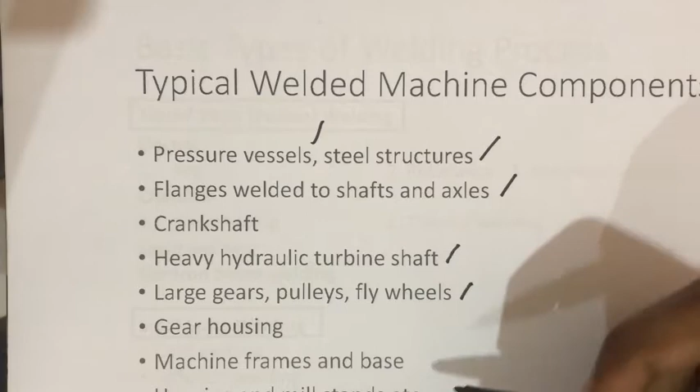So crankshafts, heavy hydraulic turbine shafts, large gears, pulleys, flywheels, gear housings, machine frames and bases, housings and mill stands, they all are being connected by the use of a permanent joint that is called the welding joint.

After this, there are different types of welding processes. They are categorized broadly. There are different types of welding joint. Broadly speaking, they are classified into liquid state, or we can say fusion welding, and another is solid state welding.

So what is liquid state or fusion welding? Fusion welding is a process that uses heat to join or fuse two or more components by heating them to a melting point.

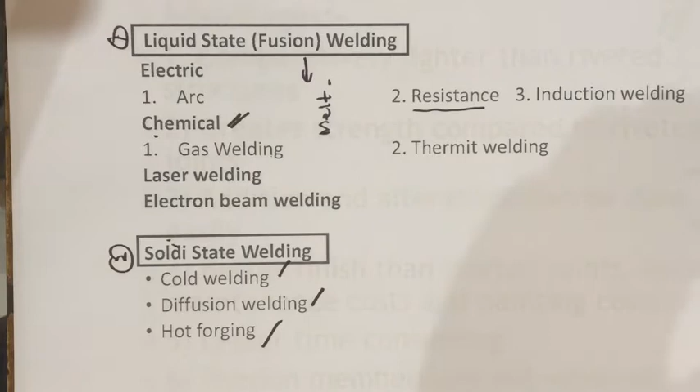So now we will thoroughly study one. Number one is electric arc welding. So what is the electric arc welding process? Basically, electric arc welding is a fusion welding process in which the heat required to fuse the metal is obtained from an electric arc between the base metal and the electrode.

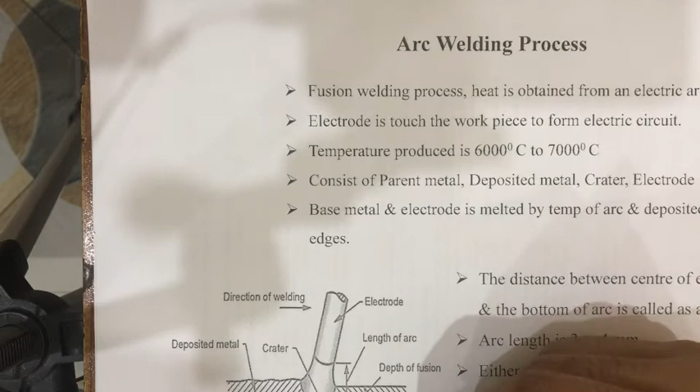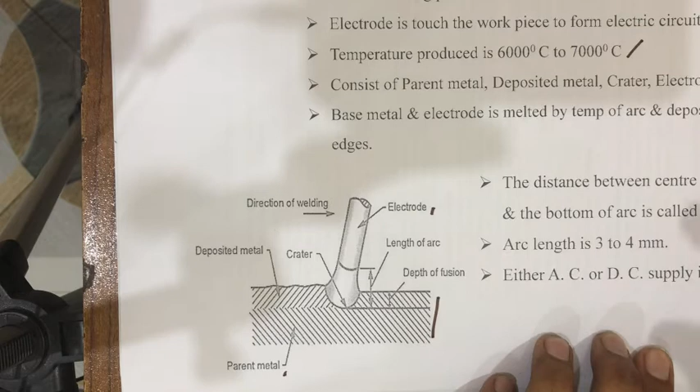So the electric arc is produced when two conductors are touched together and then separated by a small gap of 3 to 4 mm such that current continues to flow through the air. As we discussed, it consists of a parent metal, deposited metal, crater and an electrode. Now, during the welding process, a crater is generated.

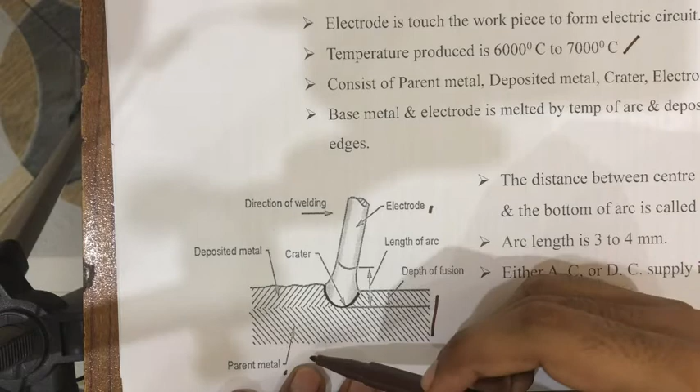The base metal, which we call parent material, and the electrode are both melted by the temperature of the arc and deposited around the edges. The distance between the center of the electrode tip and the bottom of the arc is called the arc length, or the length of the arc.

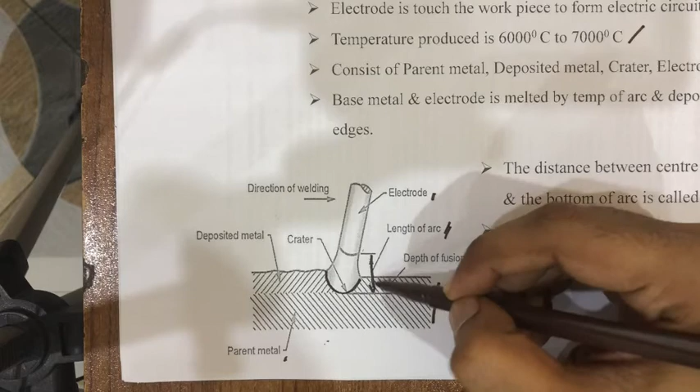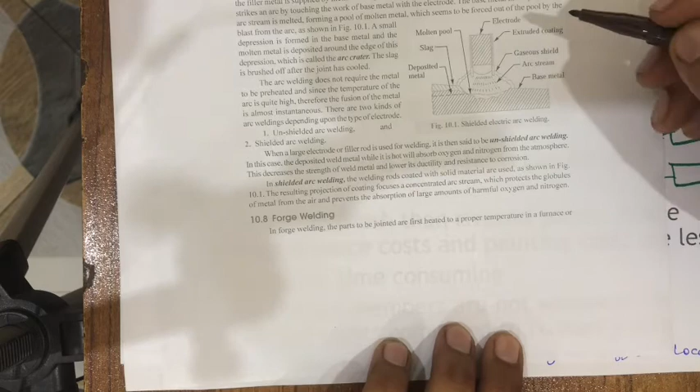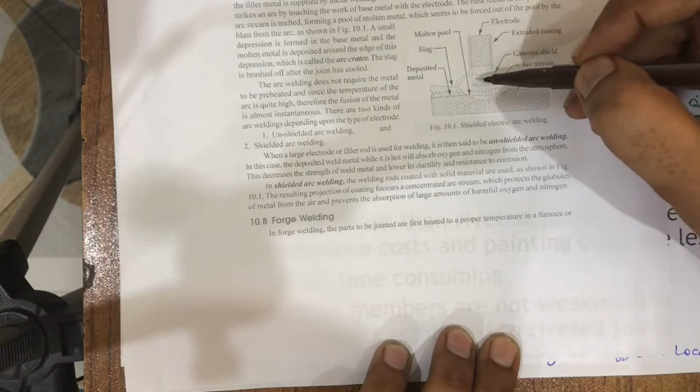This is nothing but the depth of fusion. As you'll see in your book, actually what is happening is a small depression is formed in the base metal and the molten metal is deposited around the edges, which is called the arc crater. The slag is brushed off after the joint has cooled.

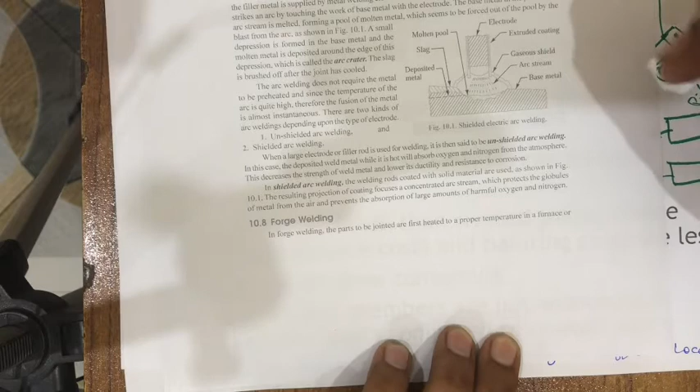So arc welding does not require the metal to be preheated since the temperature of the arc is quite high, already around 6000 to 7000 degrees Celsius as we discussed.

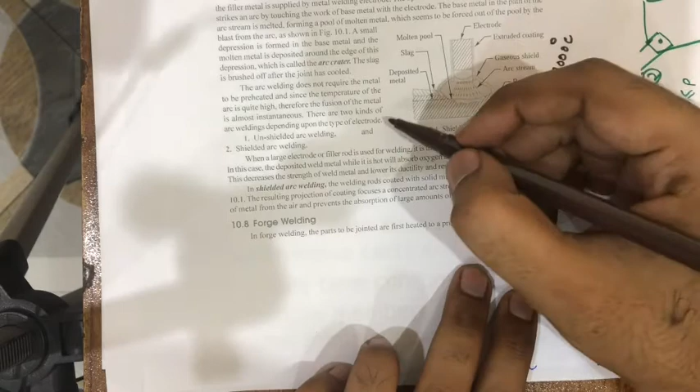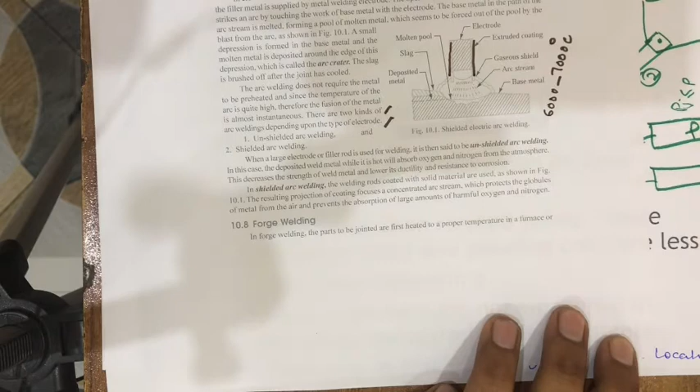So when a large electrode or filler rod is used for welding, it is said to be unshielded arc welding. In this case, the electrode will not be shielded by any inert gas. The deposited weld metal, while it is hot, will absorb oxygen and nitrogen from the atmosphere.

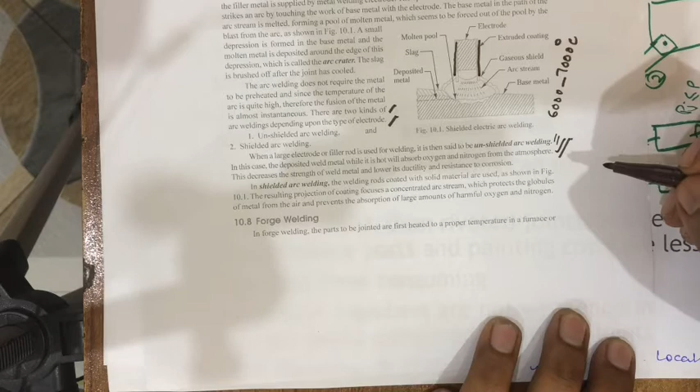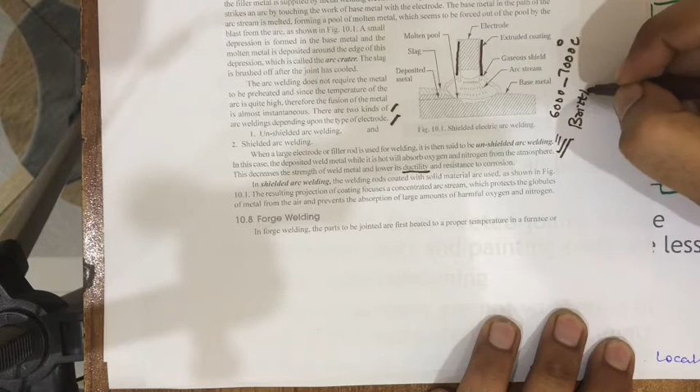And it decreases the resistance to corrosion. That means our weld becomes vulnerable to corrosion.

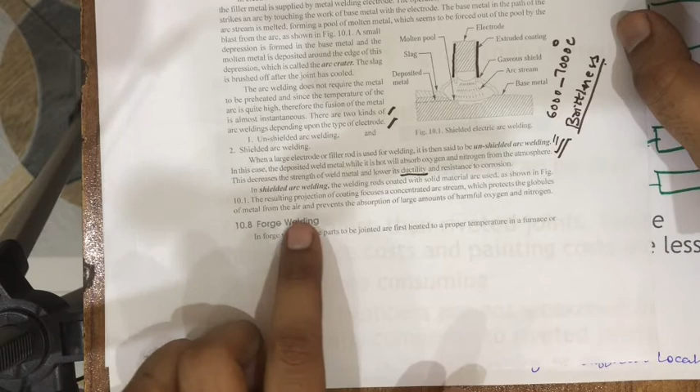In shielded arc welding, the welding rods coated with solid materials are used. The resulting projection of the coating focuses a concentrated arc stream which protects the globules of metal from the air and prevents the absorption of large amounts of harmful oxygen and nitrogen.

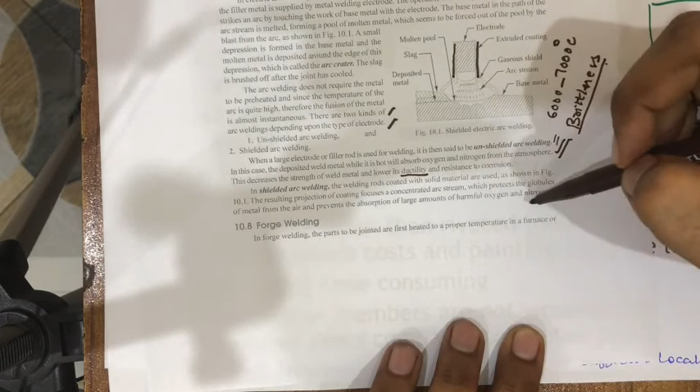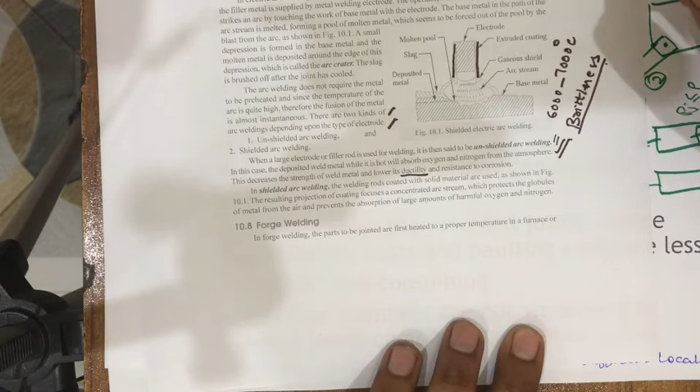So this is called a shielded arc, this is called the shielded arc welding process. So basically this is an electric arc welding process. Sir, you can see this in this video.

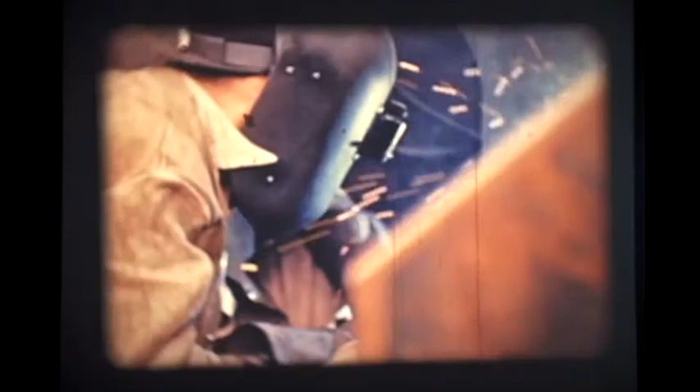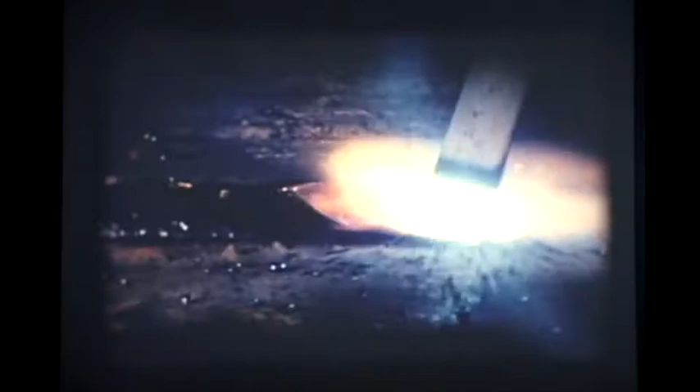Shielded arc welding is usually accomplished by means of an electric arc formed between the work and a coated metallic electrode. Let's see what happens. When the arc is struck, it almost instantly creates a temperature of about 6,500 degrees Fahrenheit. This melts both the base metal and the metal in the electrode.

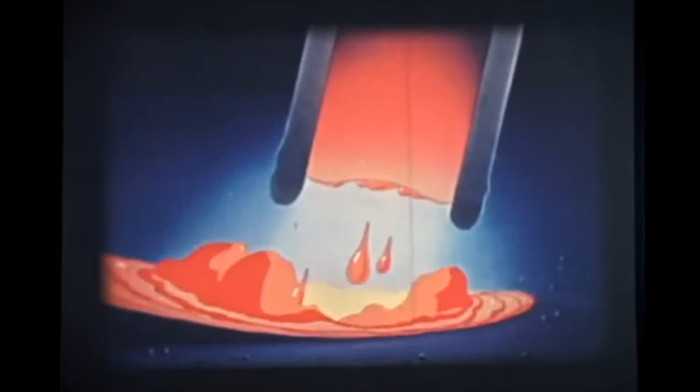The metal from the electrode is melted off in tiny droplets, carried across the arc and mixed with the molten base metal. The force of the arc and the forward travel of the electrode causes the mixed molten metal to be pushed to the rear of the crater where it cools to form a bead.

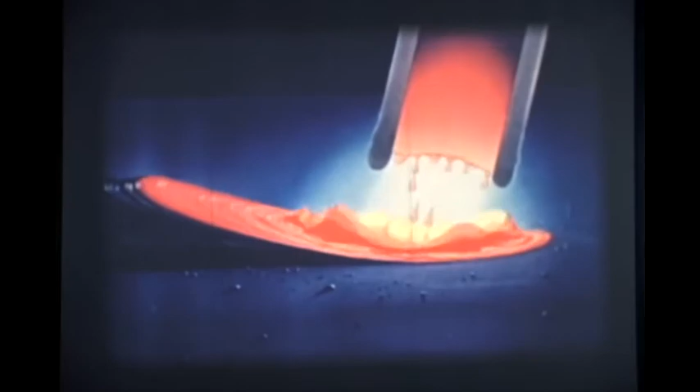The movement of this metal toward the rear of the crater and the depth of the crater are an excellent check on the quality of the work. The operator should learn to use it as his guide.

At the same time that the metal is melting, the coating on the electrode is being consumed. This takes place slower than the melting of the electrode, which shields the arc and helps direct the flow of metal. It also permits the use of higher currents, with the resultant faster deposit of weld metal.

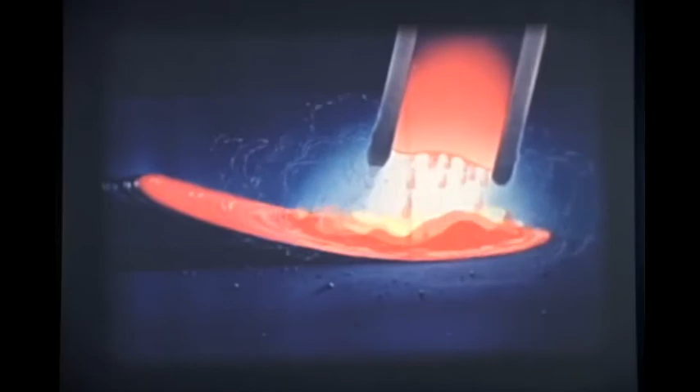A gas is formed, covering the arc with a protective shield that prevents the exposure of the molten metal to the air and therefore prevents the formation of harmful oxides and nitrides in the deposit.

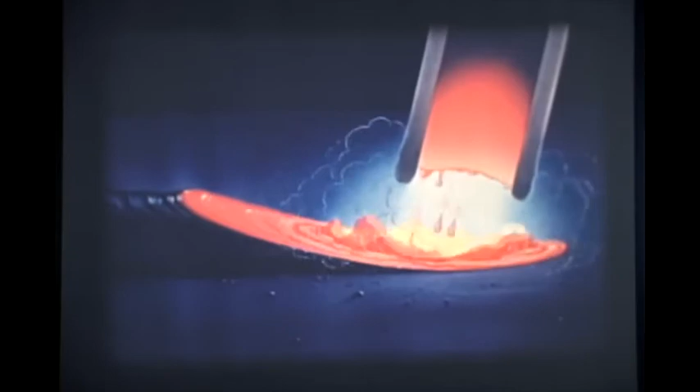Also from the coating, chemicals acting as cleansing agents enter into the metal to help remove impurities. These chemicals with the impurities float to the top and, cooling, form a coating or slag over the bead. This slag causes the molten metal to cool more slowly and has an annealing effect.